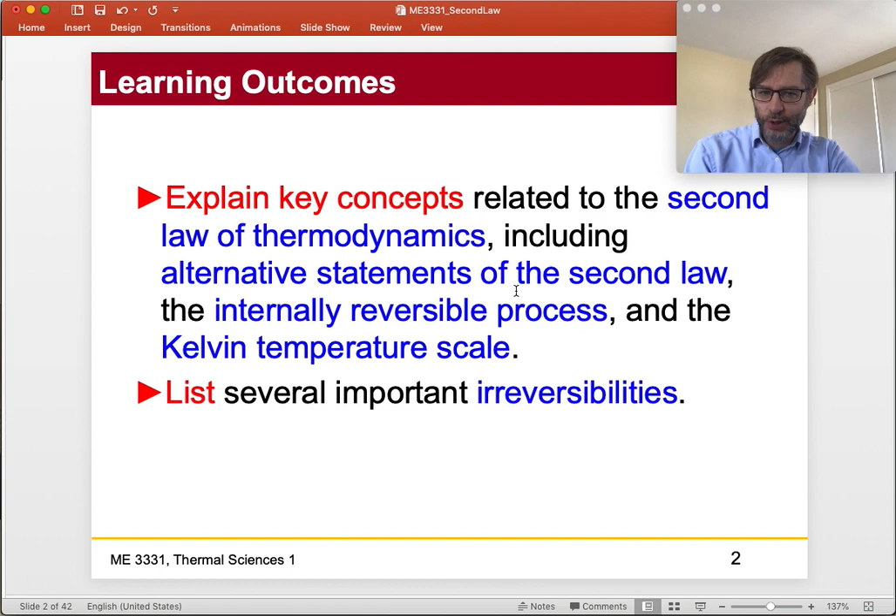Okay, we're going to list several important irreversibilities. Those are things that cause a system or a thermodynamic process to be not reversible, and we're going to learn what reversible and not reversible means. And we're going to evaluate the performance of power cycles and refrigeration heat pump cycles using key corollaries.

Now, we're not going to do cycle analysis per se, but what we're going to do is look at the temperatures that the cycles are exchanging heat with, so temperature sinks, and derive certain things about these cycles based on that. And you'll see what we mean by that.

We're going to describe the Carnot cycle, which is the most efficient theoretical cycle that one can have in thermodynamics. We're going to apply the Clausius inequality. I'm sorry, the Carnot cycle is the most efficient cycle for a power cycle operating between heat sources, okay? And there are other exceptions. Okay, apply the Clausius inequality is the last thing we're going to do.

Okay, you may say, this is stuff I have no idea what the heck you're talking about. All right, that makes sense because you've never seen this before. First law, you've seen before. You probably even saw it in high school. Second law, you have not seen before. I guarantee you, unless you've taken some really advanced statistical thermodynamics or chemistry course, you've probably not seen second law, okay?

Entirely new material. So let's do our best here to do a little short primer on this, and then we'll do an example problem, and hopefully you'll get some idea at least of how we get started here.

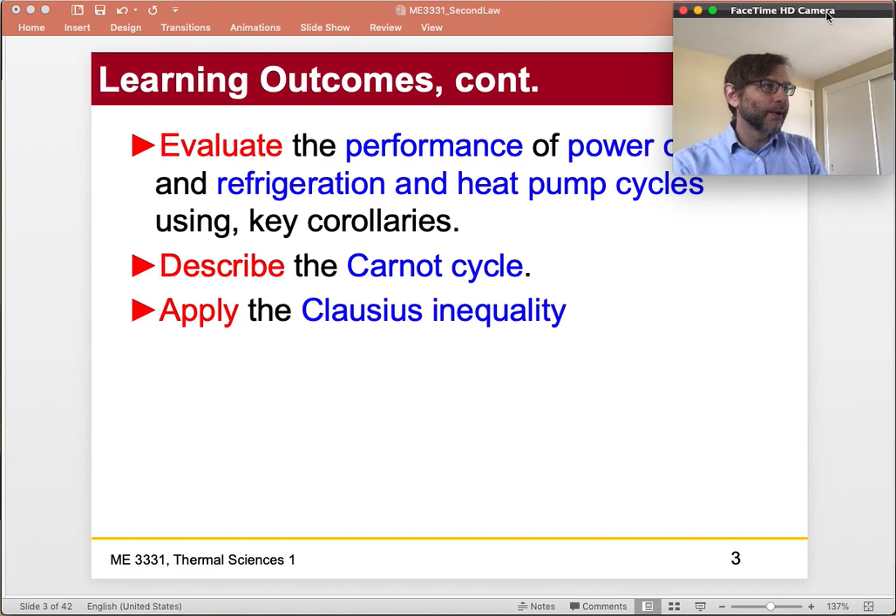Oops, what happened to me? What happened to me here? I'm moving around. Okay, sorry about that. Okay, here we go. All right.

From the conservation of mass and energy principles, mass and energy cannot be destroyed or created. All right, so we know that. These are conservation laws, that the mass can't be created or destroyed. We know that, right? So first law, Q minus W plus H1 minus H2 plus V1 squared minus V2 squared, et cetera, okay? You got that, equals 0.

For a process, conservation of mass and energy principles indicate the disposition of mass and energy. But, however, here this is the but, they don't infer whether the process can actually occur. You might say, well, if it meets the laws of energy conservation, then it's all good, right?

Well, no, not necessarily, because you can have energy in equals energy out, and we'll explain a couple of scenarios where a cycle will totally be valid according to the first law, but not valid according to the second law, and not actually physically possible, okay? And that's really the basis of the second law, is describing these processes that can't happen, okay?

So the second law of thermodynamics provides the guiding principle for whether a process can occur or not. All right, so as I mentioned in the class, maybe in the beginning, we talked about perpetual motion machines. There's a perpetual motion machine of the first kind and of the second kind.

The perpetual motion machine of the second kind doesn't violate the first law, but violates the second law, meaning that energy conservation is fine, but it's not a viable cycle based on the second law of thermodynamics, which we'll describe.

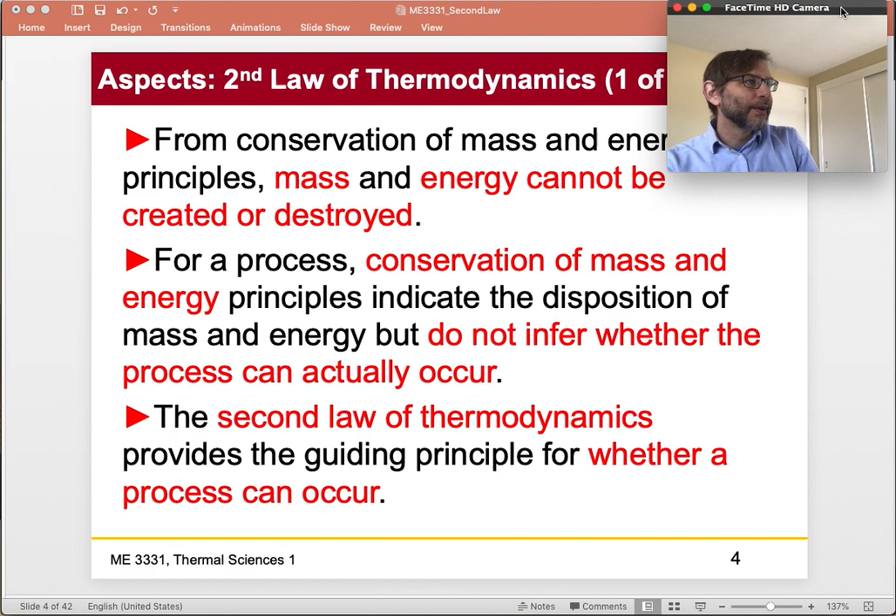Okay, so the second law of thermodynamics has many aspects, which at first may appear different in kind from those of conservation of mass and energy. So one thing we can do is predict the direction of processes and establish the conditions for which thermodynamic equilibrium exists. We've talked about equilibrium, like when two blocks are in thermal communication, touching each other, and they reach the same temperature. But we can establish the conditions for equilibrium, like phase equilibrium and mixture equilibrium.

Determining the best theoretical performance of cycles, so we can actually use the second law to determine how good. So the first law says that you can't get anything for free. The second law says you can't even do that well. You have some limitations. There are some maximum efficiencies that you can only achieve. Determine the best theoretical performance of cycles, engines, and other devices, and evaluate quantitatively the factors that preclude attainment of the best theoretical performance.

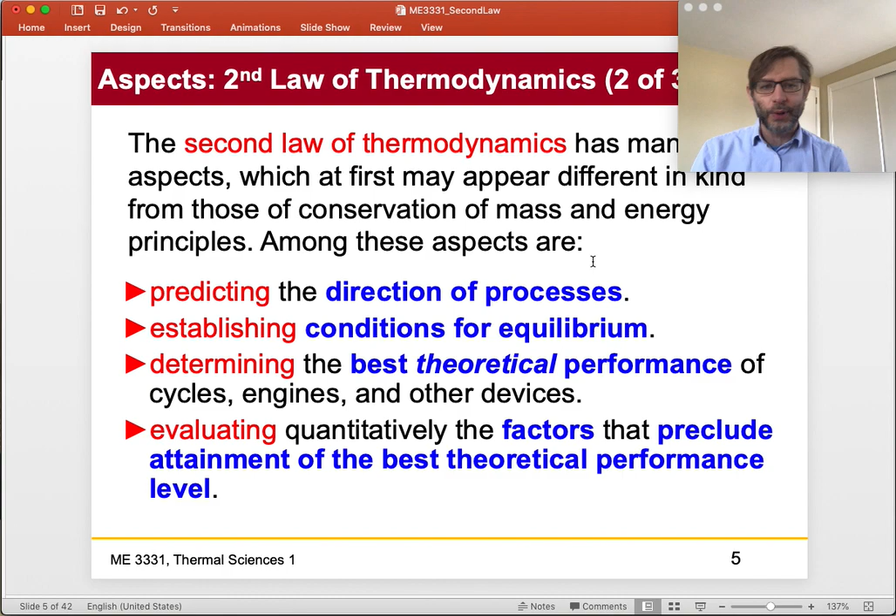So we can use the second law to decide, well, what's causing the loss? Where are the what we call irreversibilities of the process, like friction, for example. Okay. Other aspects of the second law include defining a temperature scale independent of the property. So we've already been using Kelvin, so a little bit of a spoiler alert, but definitely Kelvin is derived based on a temperature scale that is independent of the properties of a thermometric substance.

Developing the means for evaluating properties such as U and H in terms of properties that are more readily obtained experimentally. So we're not going to be really doing these things. We're going to be using these things. So these are other aspects that we're probably not going to be doing much about.

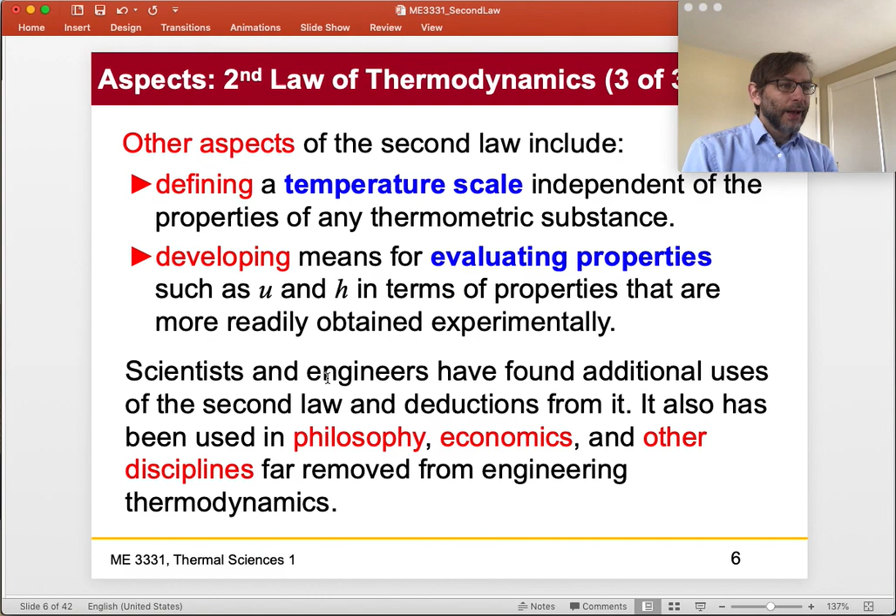Okay, scientists and engineers have found additional uses for the second law and deductions from it. It also has been used in philosophy, economics, and other disciplines. That mainly pertains to the idea of chaos and the idea of entropy. So we're not going to get too much into that, but it is a very interesting field of study and something we can talk more about if you're interested.

Let's start with the first one. Oops. Okay, so you may be hearing my cat in the background. She's here on the floor. She may be meowing at me and scratching my leg while I'm doing this. Okay, go away, cat. Go away. She wants attention or food or something. I'm not sure. Okay, let's just continue on here. I'll get attacked by my cat.

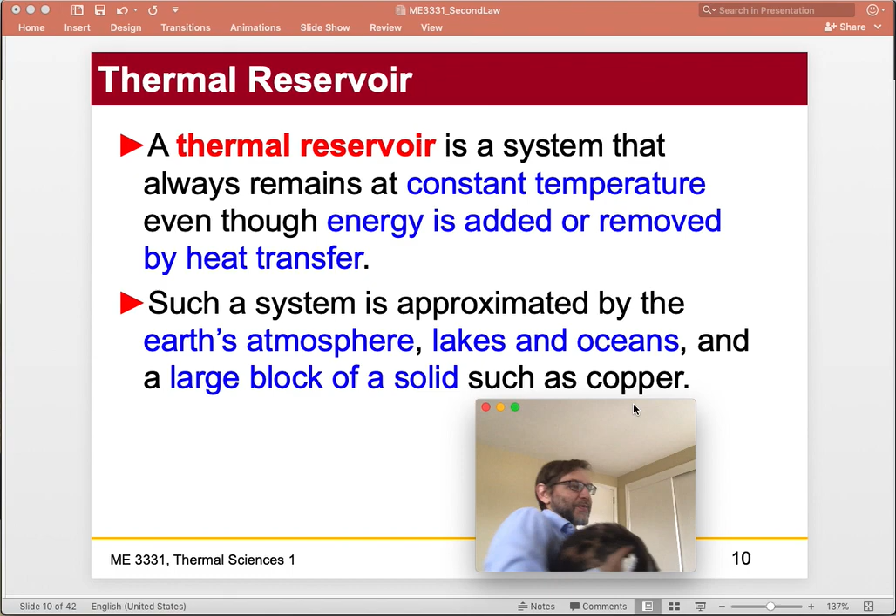Whoa! Now we get the cat right here. Say hi, kitty. Okay. I think she wants to be involved. Okay. It's pretty funny. Okay.

All right. So such a system is approximated by the Earth's atmosphere, lakes, oceans, and a large block, such as a block of solid copper. So essentially we're talking about a very large block that we assume stays constant. The temperature of these thermal reservoirs doesn't change. So we can assume that they always remain at the same temperature, even though we put energy in or take energy out, which technically doesn't exist, right? But it's a concept. Just think about it as a concept, okay?

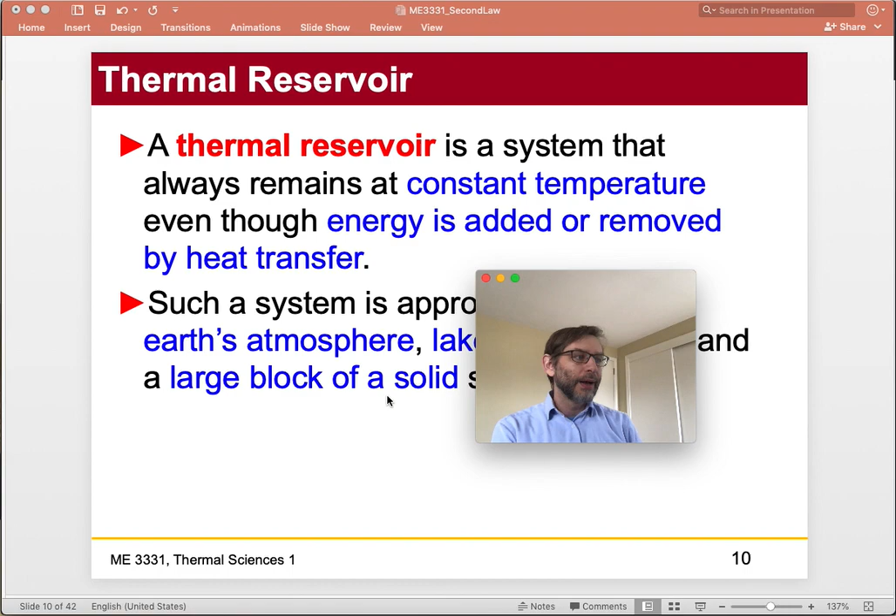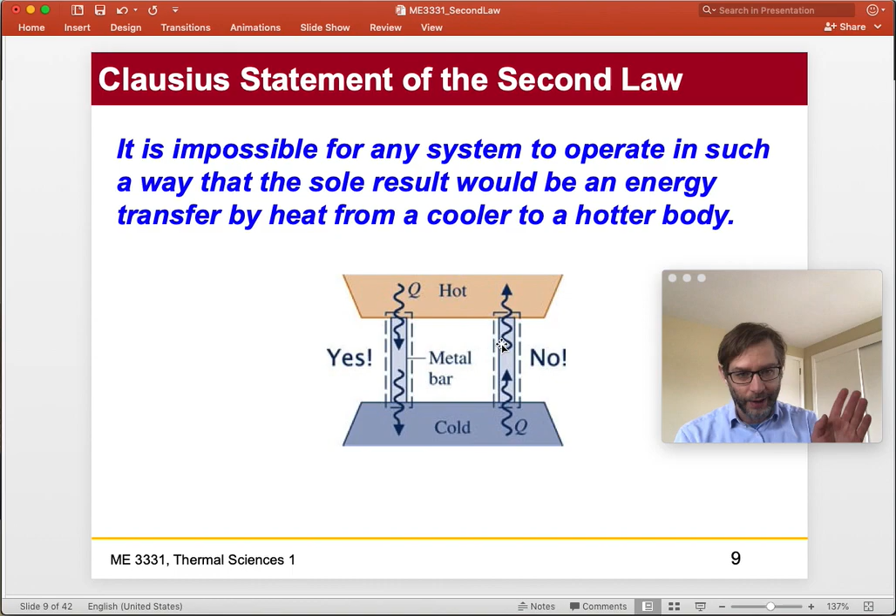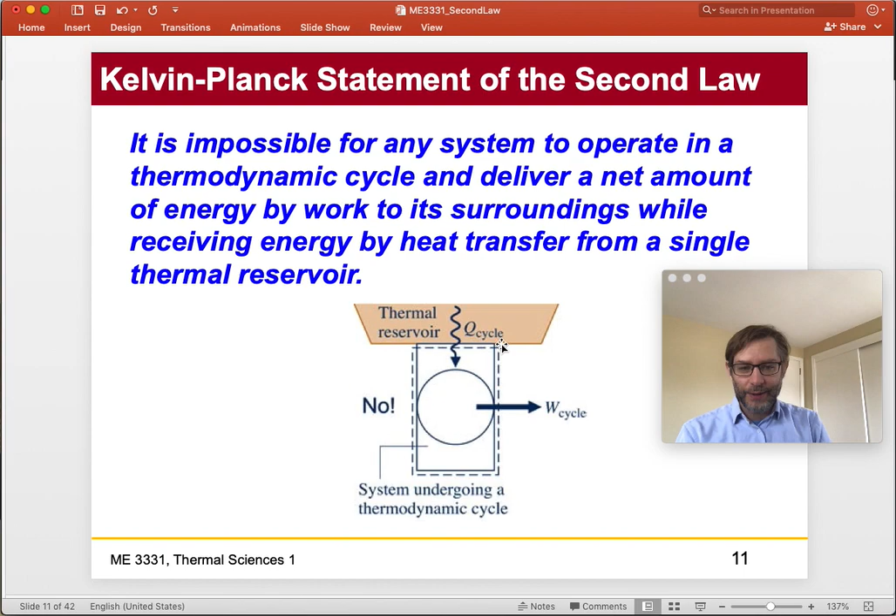So this would be totally fine. This and this would be totally fine based on the first law. Heat in equals heat out. No problem, right? No big deal. You can't do that, okay? Just like this. Heat in equals work out. What's wrong with that? It's totally feasible, right? You take all the heat you put in and you get work out. No, you can't do it. Sorry. That's not allowed. All right. So, great. Let's move on.

All right. So, the last thing we're going to do today, we've got about 18 minutes. We're going to do an example problem where we get into this a little bit. So how do we demonstrate that these statements are valid or that they are a violation of each other? We're going to complete the demonstration of the equivalence of the Clausius and Kelvin-Planck statements, meaning that they're both impossible, by proving that one proves the other, essentially. By showing the violation of the Kelvin-Planck statement implies a violation of the Clausius statement, and you could do the same vice versa. But we're going to do it this way.

Okay. Let me get my pen and my sketchbook out here. Oops. Let's get this thing working here. All right. Now we're just going to find it. Okay. So here's the example, and I will move this over here.

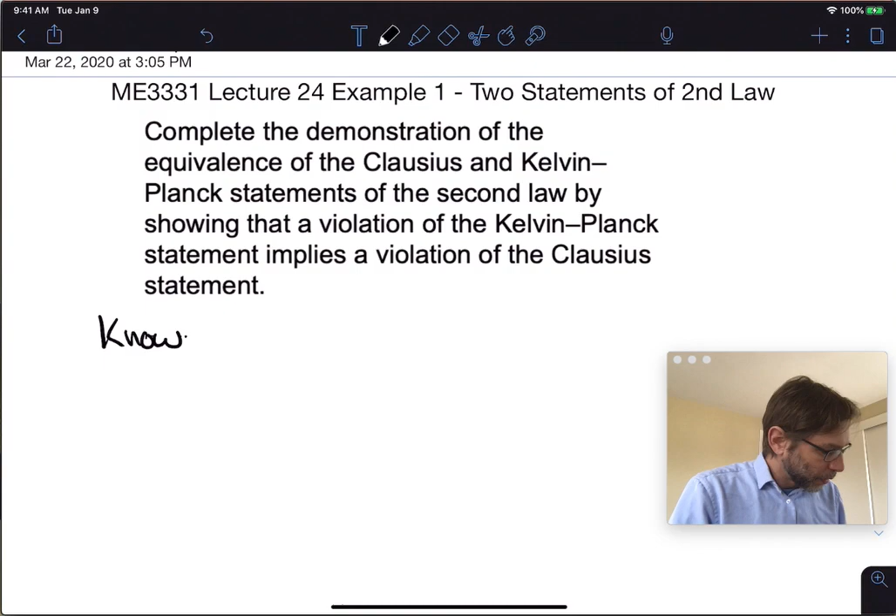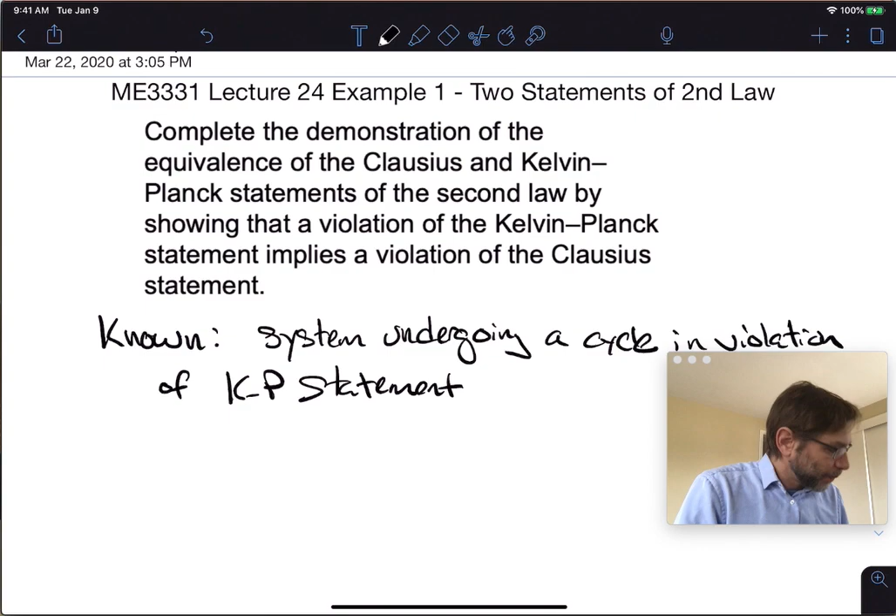All right. So the problem is: complete the demonstration of the equivalence of the Clausius and Kelvin-Planck statements of the second law by showing that a violation of the Kelvin-Planck statement implies a violation of the Clausius statement. Okay, here we go. So, known: we have a system undergoing a cycle in violation of the KP statement. So we have a system undergoing a violation of the KP statement, and we're going to show that also implies a violation of the Clausius statement.

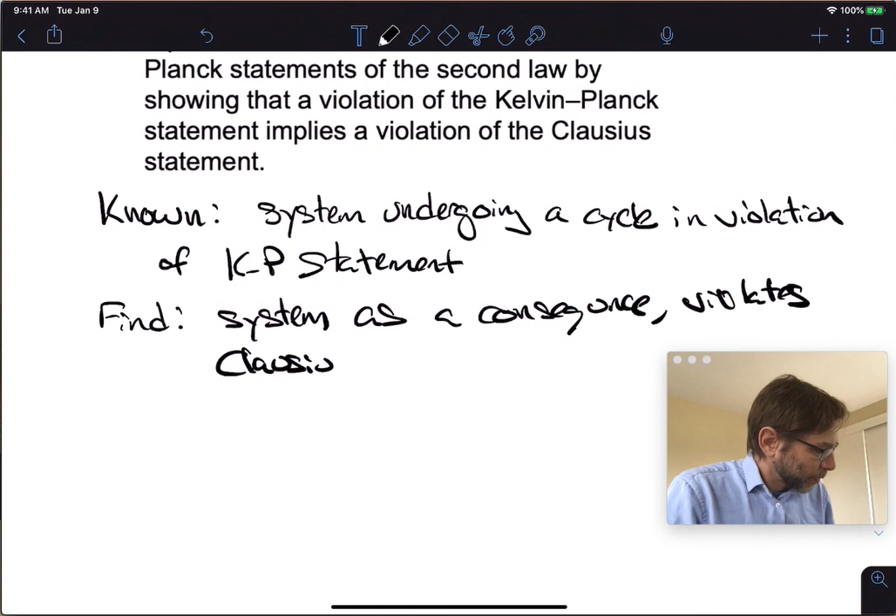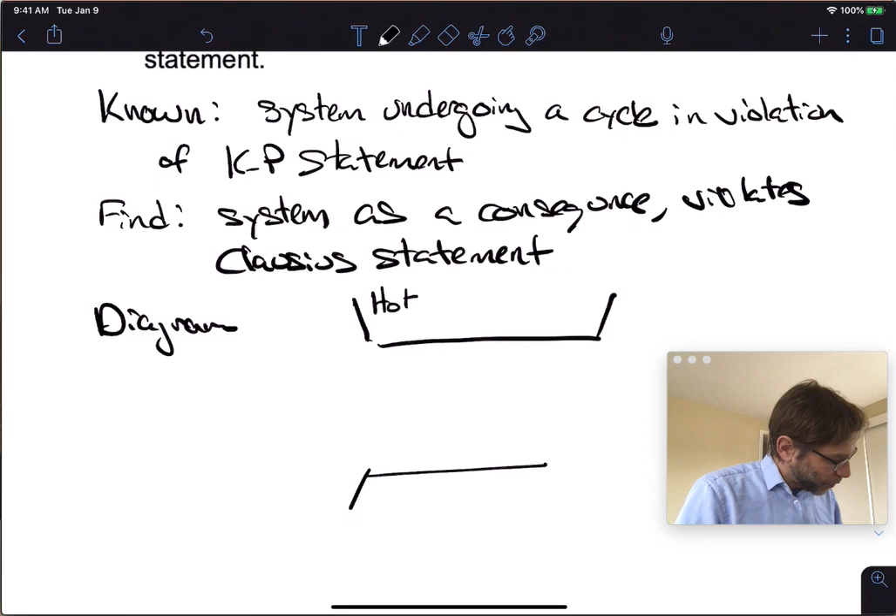Okay, so we're going to find that the system as a consequence violates the Clausius statement. We're going to do this using kind of a theoretical idea. So, engineering model. Let's make a diagram first. The way we're going to do this is we're going to have two reservoirs: a hot reservoir and a cold reservoir. Hot and cold reservoir.

Now what we have to have is some sort of thermodynamic cycle going on. So this is our one that's violating the Kelvin-Planck statement. It's a violator, so it's going to be taking heat, which we'll call QH, and making work out of it. So we'll call this CV1, control volume 1. Actually, it's system 1, not a control volume, because there's no mass passing through it. Then we're going to show that it also violates the Clausius statement as well.

So we have to have a system that also does the following. The same work is going to go in here, so this work is the work input to this refrigeration cycle, with QC and QH prime. So now we've got a refrigeration cycle, and this one doesn't actually violate. I'm going to make my boundary 2 here. So this is system 2.

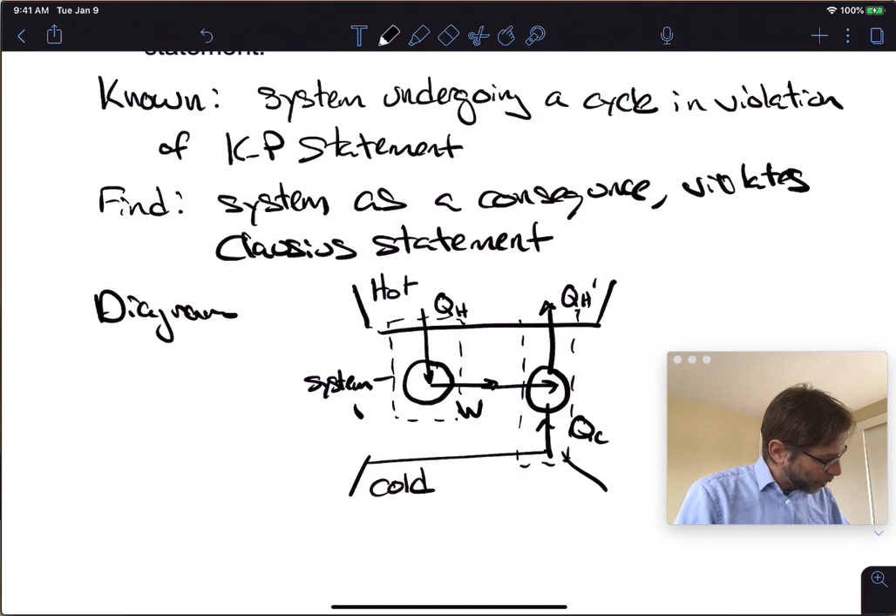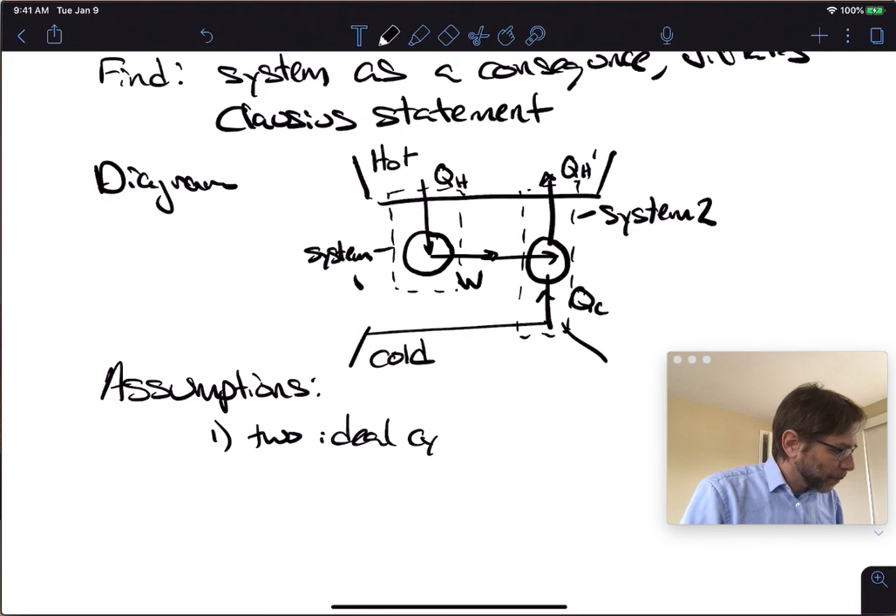Okay, so now assumptions. One, we have 2 ideal cycles. Anything else? We're going to say that the reservoirs, cold and hot, are at constant temperature.

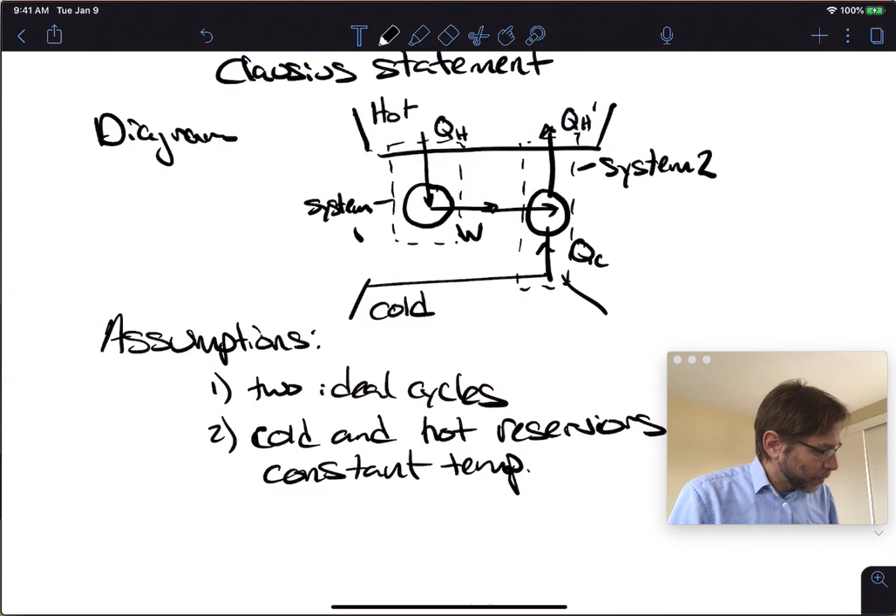Okay, we're going to assume they're at constant temperature. Fine. Okay. All right, good. And then what we're going to do is we're going to do some analysis. All right, so here's our 2 systems. So we have system 1 and system 2.

System 1 is a Kelvin-Planck violator, meaning that it doesn't reject any heat. It violates the Kelvin-Planck statement because it only exchanges heat with one source and makes net power. And then we're going to take that power and we're going to put it into a refrigeration cycle. Okay, so the analysis goes like this. So if we take from system 1,

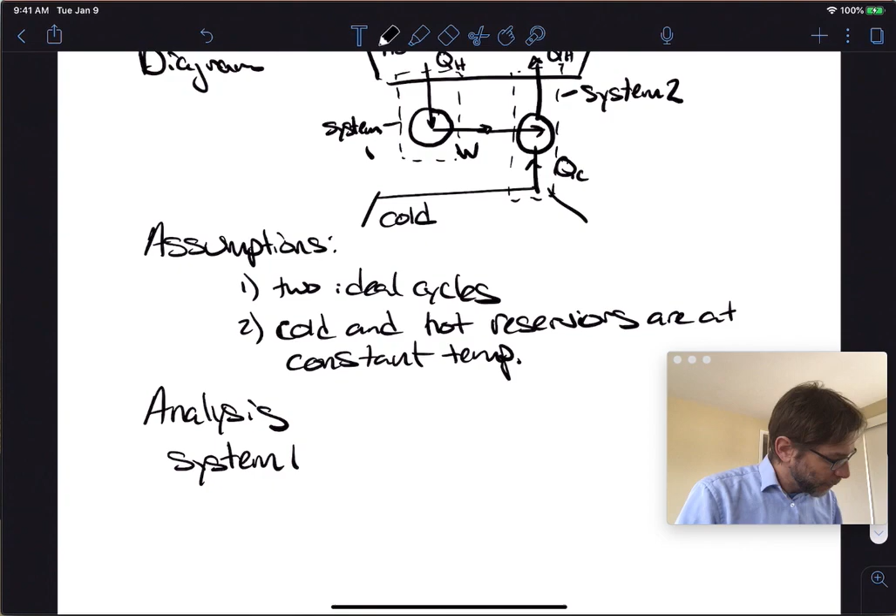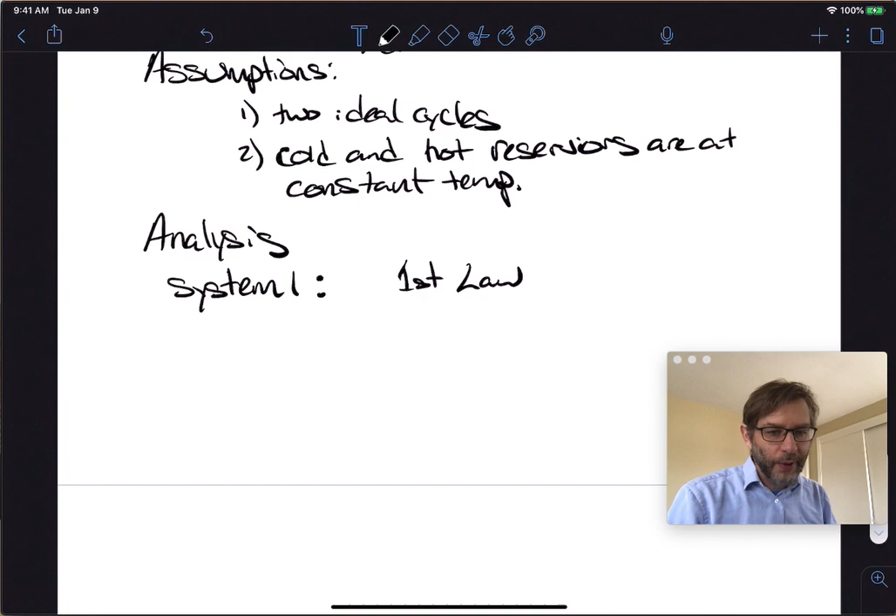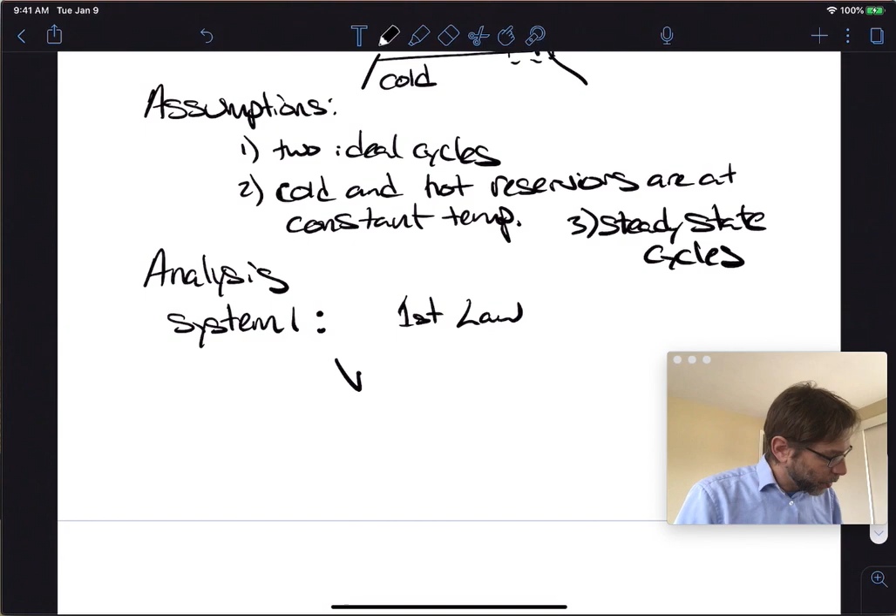so system 1, we're going to do the first law. So for this system, essentially, all we've got is heat and work. We don't have anything crossing the boundary. It's steady state. We're going to assume here steady state cycles. Okay. So I'm calling work of the cycle equal to QH for system 1. And system 1 and system 2.

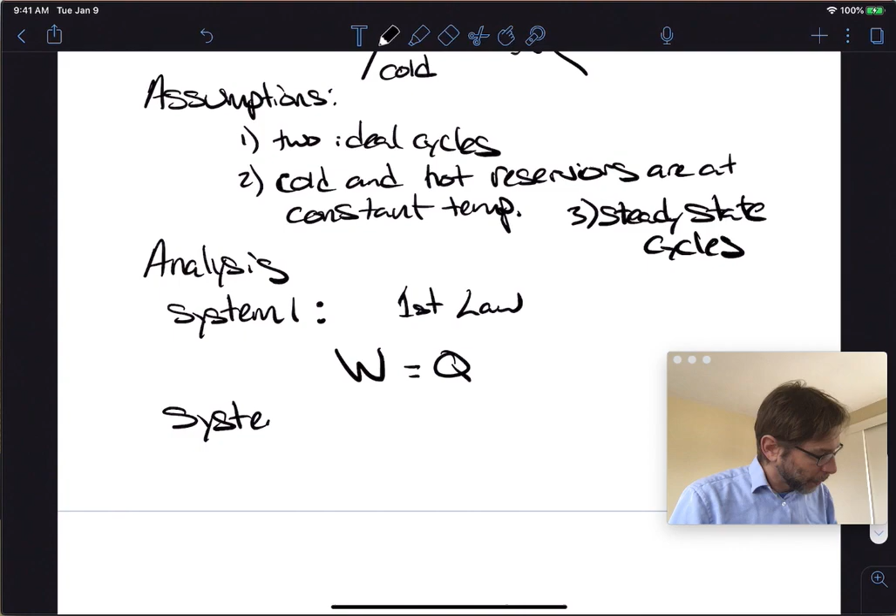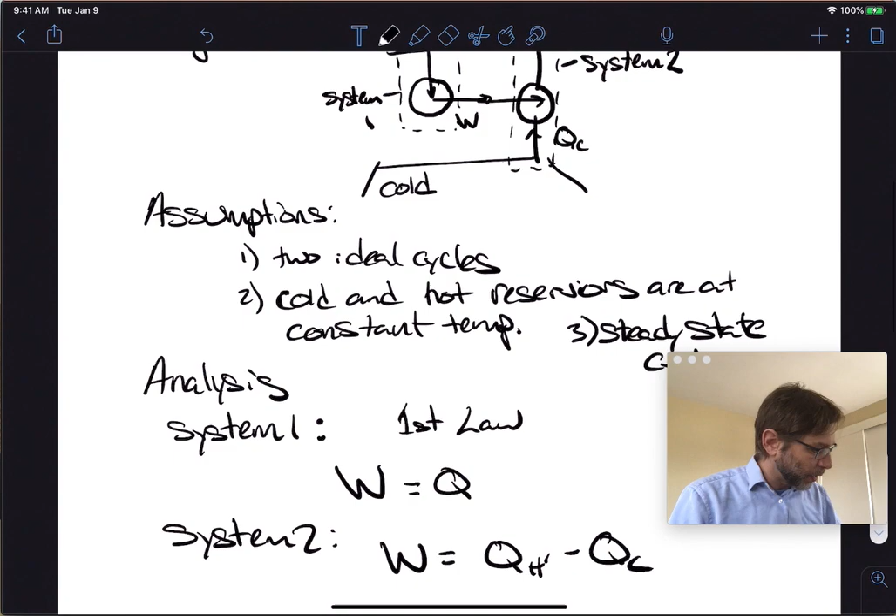So this is totally cool with the first law, right? Q equals W, no big deal. First law, no problem. So here, the work of the cycle equals QH prime minus QC, meaning the work that we put in is this negative work, minus QH minus QC. So QH would be the heat out minus heat in, which is okay with our sign convention.

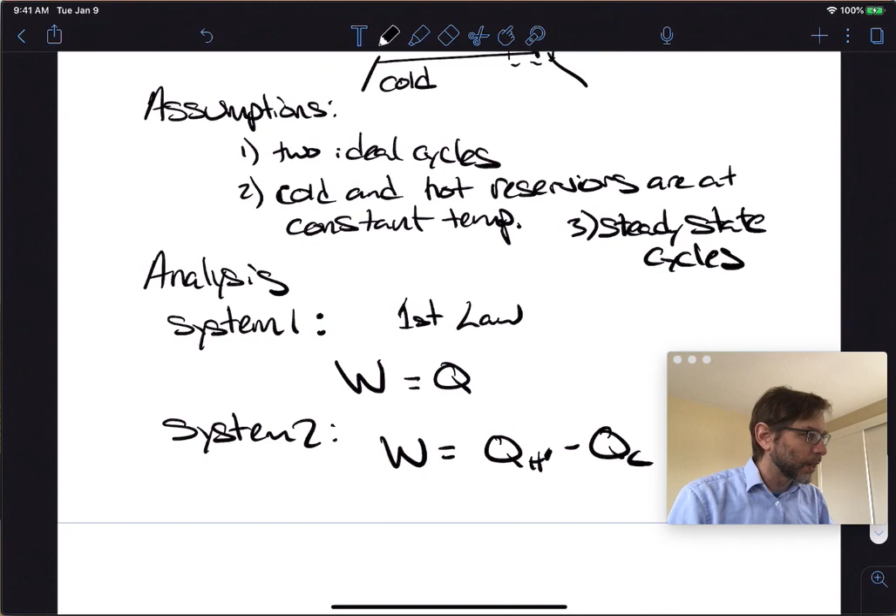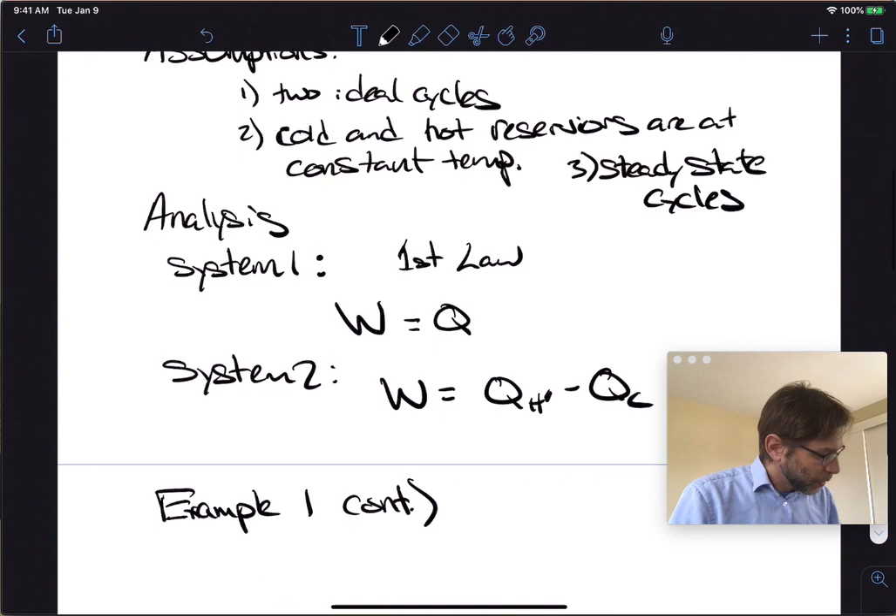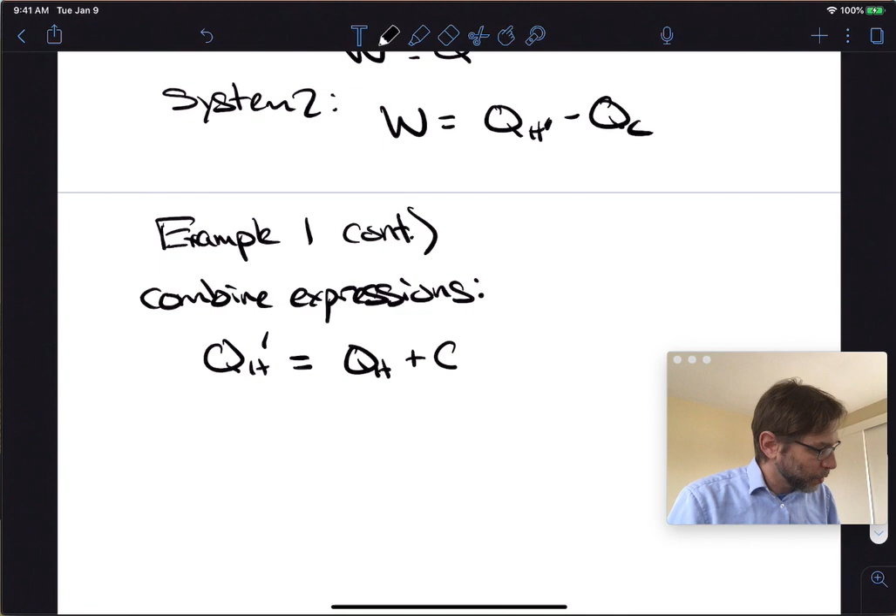So if we combine, hold on, let me just say example 1 continued. Okay, so then we can combine expressions, and we get the following thing. We get QH prime is equal to QH plus QC. Okay, so this QH prime essentially is QH plus QC.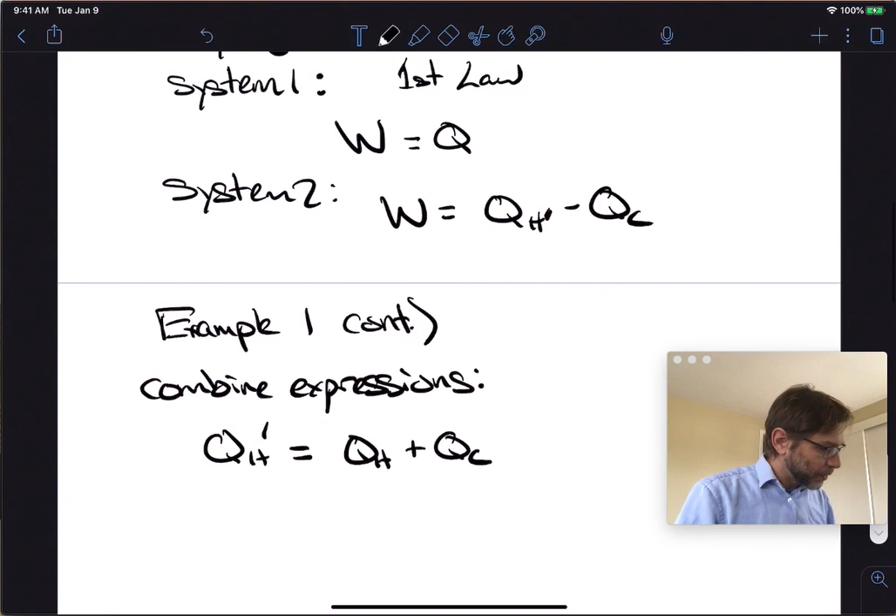All right, now, how are we going to say that this implies a violation of second law? Because system 2 is totally fine. System 2 takes work and pumps heat from a cold body to a hot body like a refrigerator does. Now what we can do though is take this as hot and this as cold, and we make our overall system diagram look like the following.

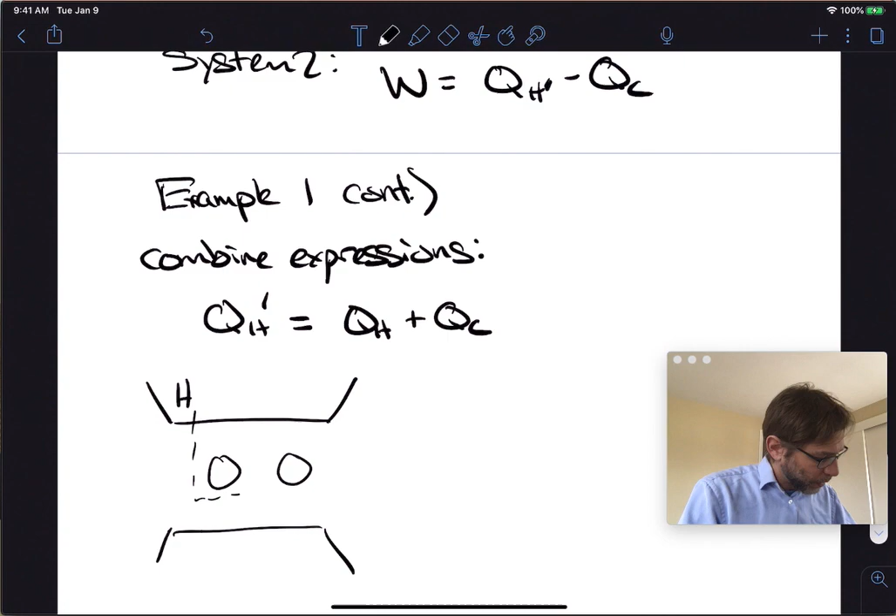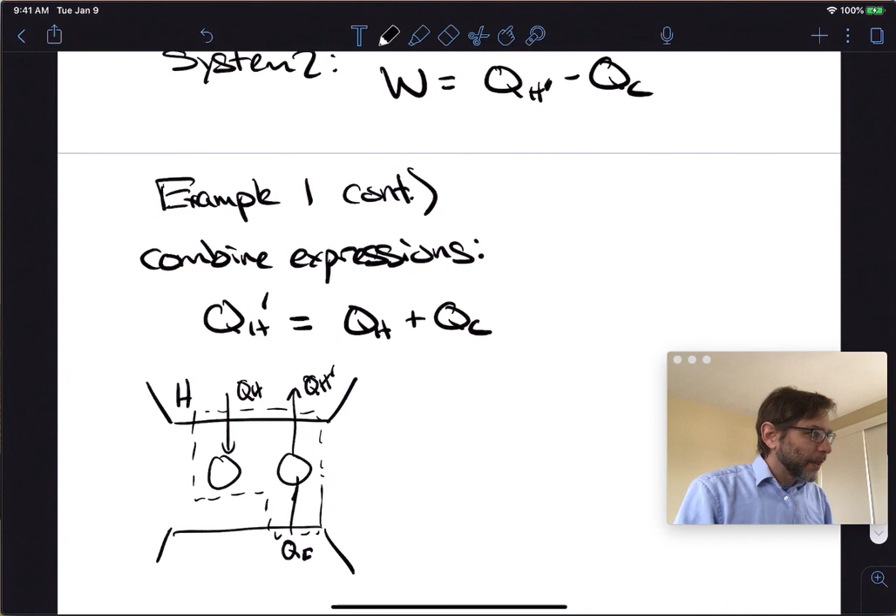Right, so we have QH here, we have QH prime here, and we have QL here, or QC, sorry. So you have QC there, okay? If we do that, and we just combine those, there's work going on, but it's inside the thermodynamic system. As I said, if you take the overall system, it doesn't matter what's going on inside.

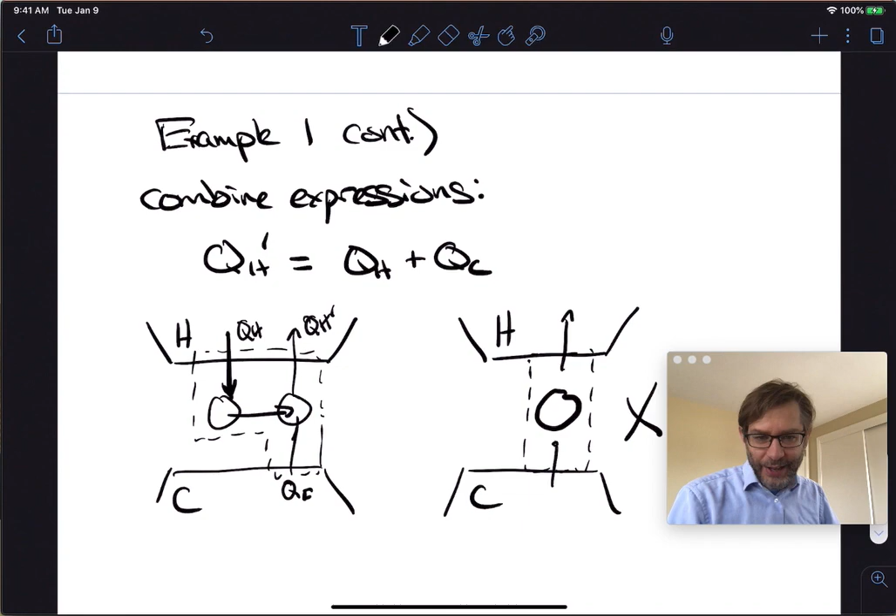So what this means essentially is that you've got a system that looks like the following. So this is cold and hot. You've got one engine, or one cycle essentially, that just takes heat from here to here with no work input. We can't have that, right? It's not okay. So that violates the Clausius statement.

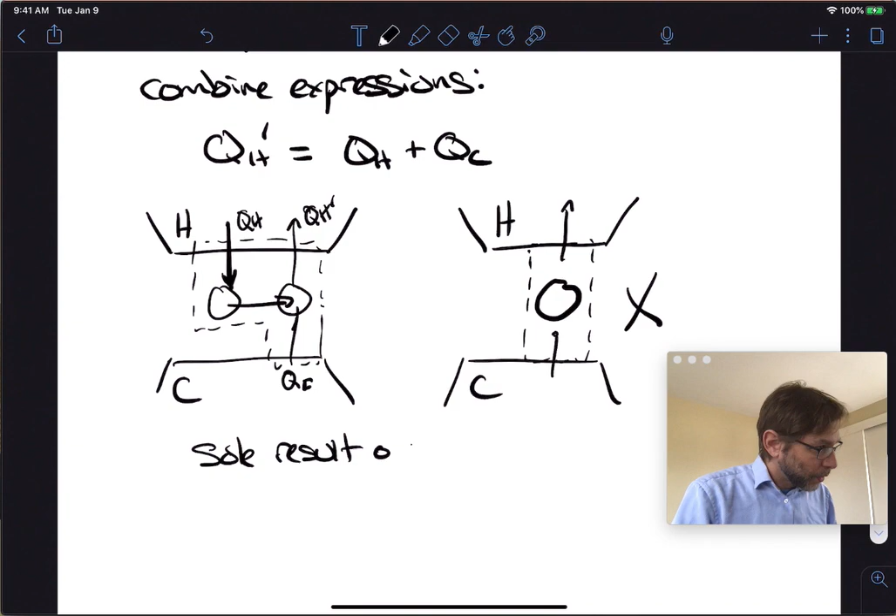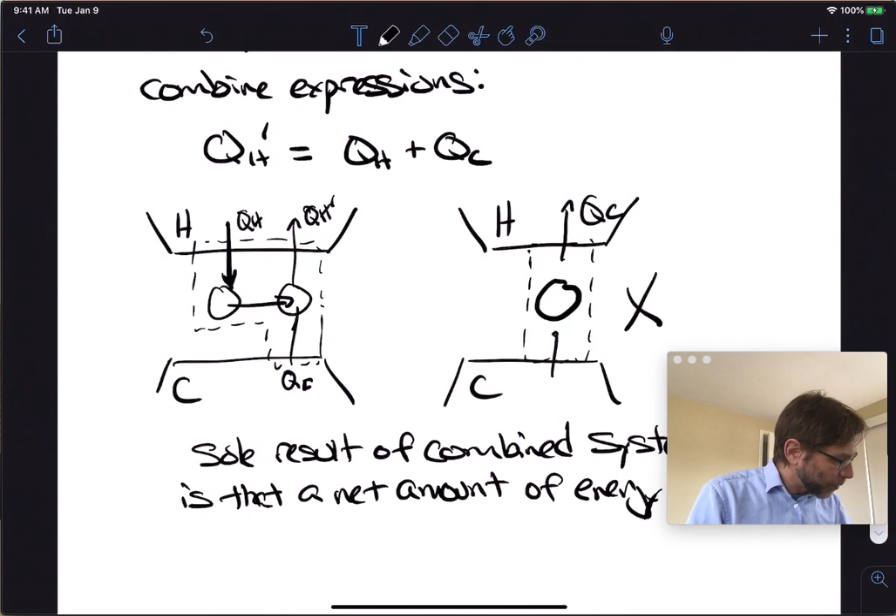So you're going to say that the sole result of the combined system, she's back again, the sole result of the combined system is that a net amount of energy, we'll call it QC, the same heat, right? So QC is transferred from cold to hot.

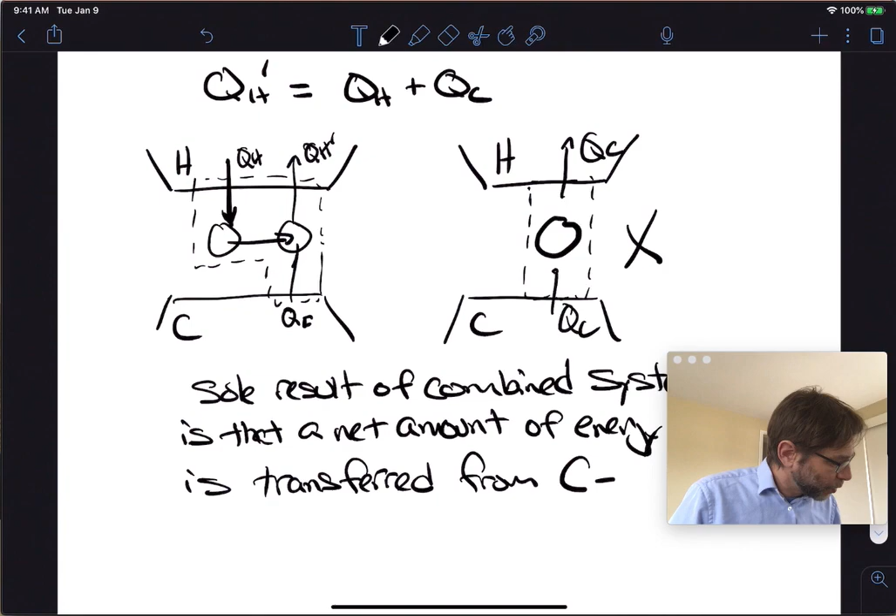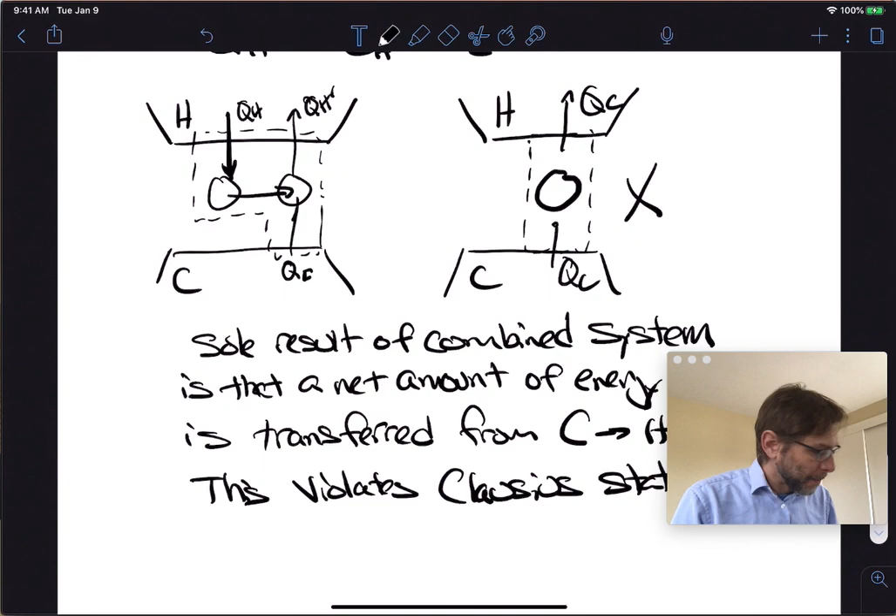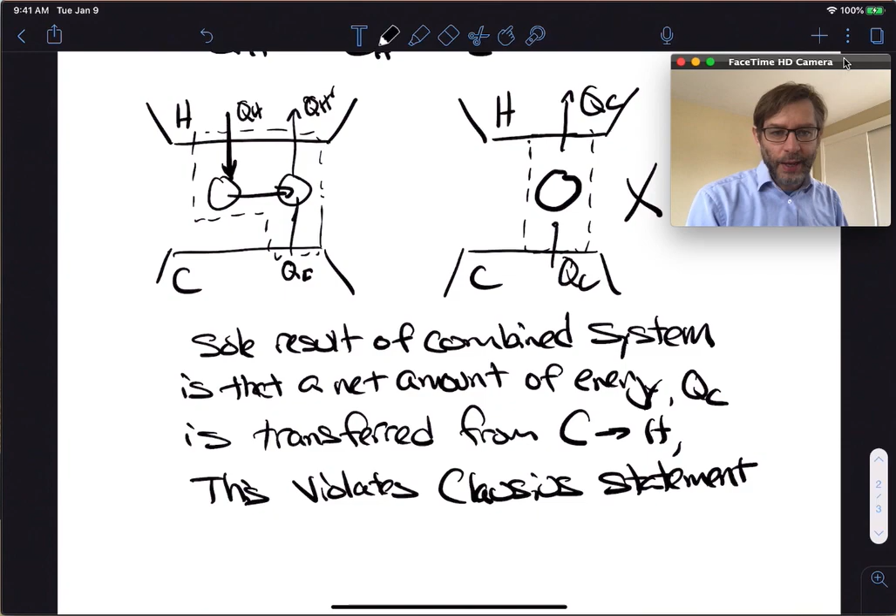Right? And so this violates the Clausius statement. And therefore, the combined system implies that the Clausius statement is also violated. Okay, so that's the idea. So we're going to do a few of these kinds of examples.